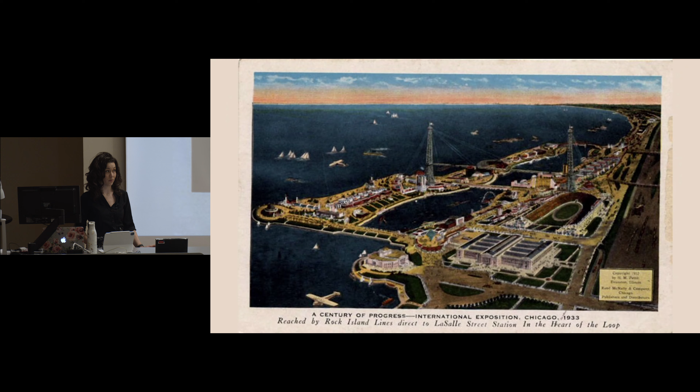The Shedd is a neoclassical temple of white marble and terracotta that was created to educate and celebrate aquatic life. Marine-themed motifs are incorporated in the design and decoration at every opportunity, all over the building's exterior and interior. Every time I go there, I see something that I haven't noticed before. The amount of detail in this building is incredible. Next time you visit the aquarium, look for these details. You will be amazed. They're everywhere. Can we turn this light down?

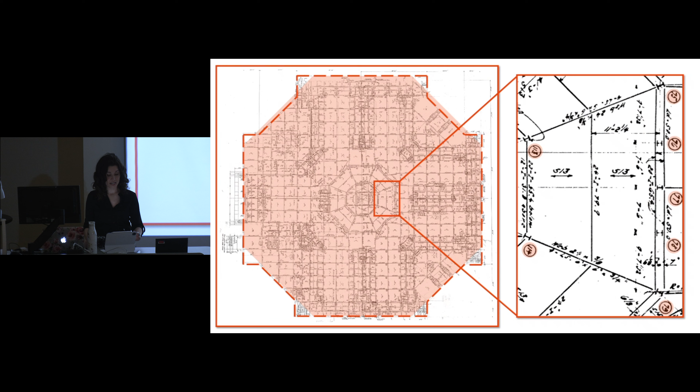All right, the building is supported by a hybrid structural system. Concrete framing at the lower levels transitions to riveted steel framing encased in concrete fireproofing at the main level and roof, with a 5-wythe load-bearing unreinforced masonry wall forming the building's perimeter and lateral system.

The structure rests on composite timber and concrete piles, and at the roof level, these are skylights that are over the original exhibits, and then this is a 10-foot tall parapet wall, which fortunately has an embedded steel frame that is braced back to the roof.

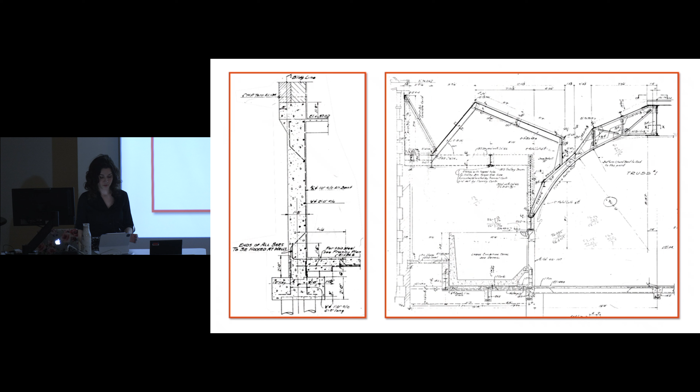Much of the lower level of the basement was originally designed as reservoirs to store and filter the water. The original basins were located in these areas, and I know you can't read it, but they say live load of 500 pounds a square foot.

That's in the basement. Interestingly, in 1930, Shedd's saltwater exhibits were stocked with seawater, not by adding salt to Lake Michigan water, but by transporting nearly 1 million gallons of water by train from Key West to Chicago. Now, Shedd makes their own saltwater on site.

The ground floor, or the mezzanine, was basically a ceiling of these reservoirs in the basement. So it was the lid. It was a 5-inch thick concrete slab, 33 KSI rebar. It had a live load capacity of 10 pounds a square foot.

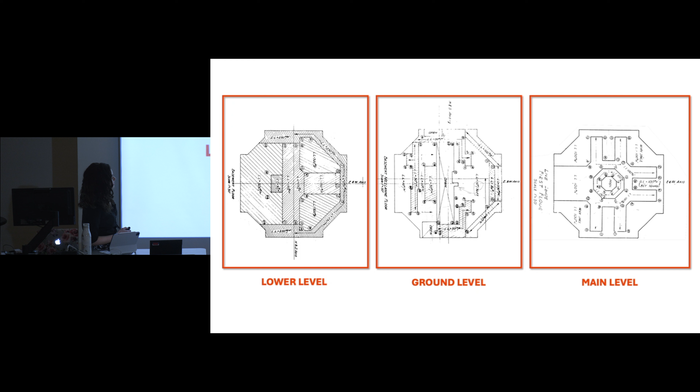Now, if you think about current code, a live load of 10 pounds a square foot is uninhabitable attic spaces with no storage. This limited slab capacity has created many challenges for Shedd over the past 5+ decades specifically, and we'll talk about some of them in more detail later.

Some locations have a live load of 50 pounds a square foot. These were drive aisles for the trucks that had the seawater to come dump them into the basins below.

And as mentioned, above the ground floor, you transition to steel framing, and then here's your main level, and you can see how they delineated these public spaces into each a gallery, and then behind the scenes spaces in the corners. They all have the same live load of 100 pounds a square foot.

All right, beginning around the 1970s, multiple renovations and additions have altered the building structure, expanding the useful floor space within the original footprint and increasing the aquarium's capacity to house animals. Klein and Hoffman has been involved in most of these projects since the 1990s.

Oh, whoops, wrong button. There we go. This button.

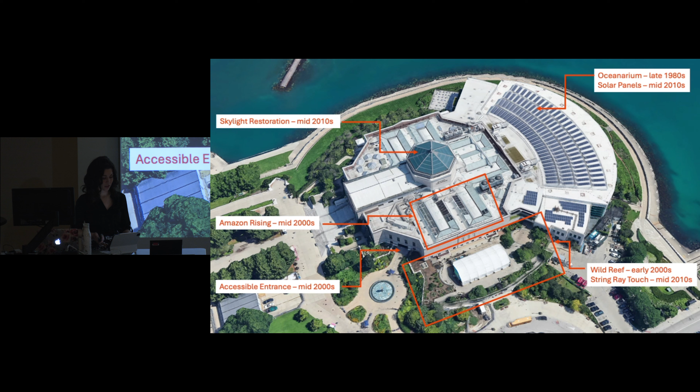All right, so as you can see, Shedd has been very proactive in adapting its building since its opening almost 100 years ago. And ahead of its centennial year in 2030, Shedd Aquarium unveiled a strategic plan called the Centennial Commitment to accelerate its mission and prepare the iconic institution for the next 100 years of service. The plan includes an ambitious experience evolution that will restore the aquarium's historic architecture, modernize the experience for guests, upgrade life support technology, and create more expansive, realistic habitats for animals.

The experience evolution process began in 2018 with an extensive research and master planning process aimed at redefining the visitor experience while maintaining a deep commitment to animal care. A multidisciplinary team, including experts in human factors design, exhibit design, and architecture, created a visitor-focused, actionable plan. As the project progressed, the design team expanded to include 18 specialty consultants, necessitating careful collaboration at every stage.

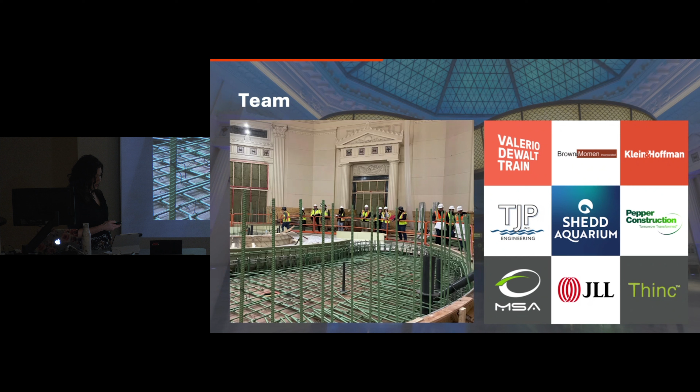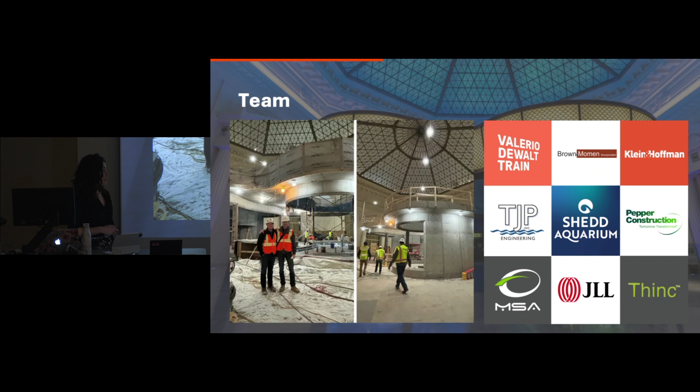Here are some of the primary ones. Obviously, the Shedd is the client. Jones Lang LaSalle is the owner's rep. Valerio Dewalt Train is the architect of record. Brown and Momen and Pepper Construction are a joint venture GC. TJP is the life support systems engineer. That is everything that goes into the animal habitats, so the filtration systems and things like that. MSA is your mechanical engineer, and Thinc is the exhibit designer.

All right, so the experience evolution is split into 4 phases, or really 5 if you want to count phase 0, which was an enabling phase. So what that means is before construction began, the aquarium temporarily relocated animals from their public habitats to environments behind the scenes where they could continue to receive quality care while their new habitats were constructed. Phase 1 was also behind the scenes. It involved closing down the Underwater Beauty special exhibit and relocating Shedd's hospital and lab space so that important animal care procedures could continue without interruption. We'll dive into phase 2 in a minute.

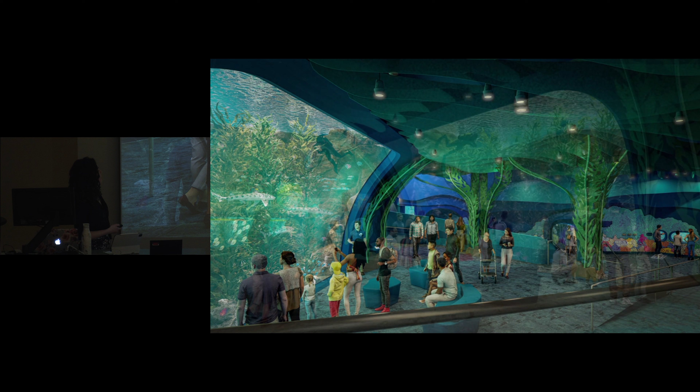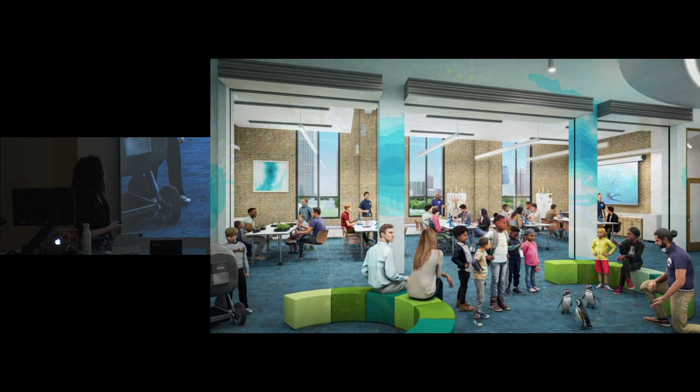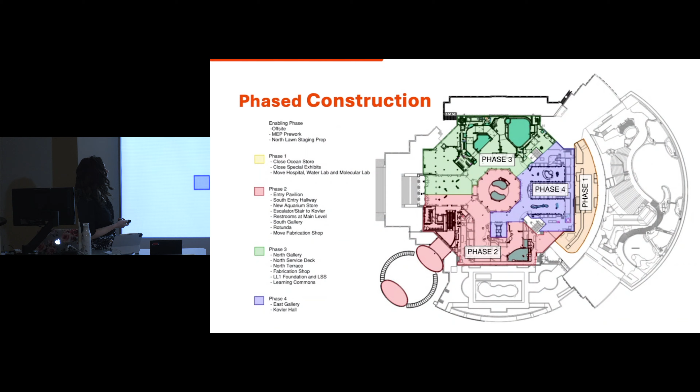The project is currently in phase 3, which completely reimagines the entire north section of the building. And here are a couple of renderings that have been released to show what's to come in phase 3, which I believe will open in 2026. Phase 4 is probably the smallest phase in terms of cost and scope, and it primarily involves non-structural exhibit enhancements to the original East galleries. And it also will be when the entire Kovler Hall is reopened.

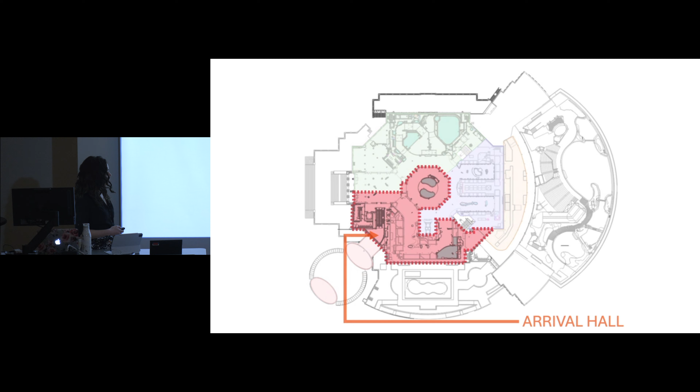All right. Throughout construction, Shedd has remained open. This is a logistical feat requiring precise coordination to maintain animal support systems, visitor pathways, and operational back-of-house spaces. Every phase prioritizes visitor access and uninterrupted experiences. Now, back to phase 2, the topic of this presentation. Phase 2 completely reworked the entry sequence with a new arrival hall, fixed major circulation problems, and reimagined several exhibits, like the center exhibit and the Arapaima habitat in the South Gallery.

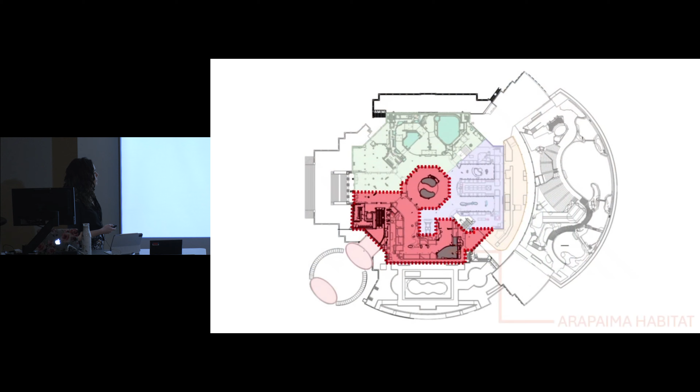All right, you may have noticed that I have not mentioned this little piece down in the southwest corner. This is the new ticketing pavilion, entrance pavilion, and then these trellis features that surround the Man with Fish sculpture. Everything that is outside of the historic building footprint was done by a separate engineer of record. It's kind of unique to this project, but in this case, Thornton Tomasetti designed the entry, ticketing, and trellises. And maybe someday you can hear Thornton Tomasetti talk about this project because it was challenging. Even though it's small compared to everything else going on in the historic building, there were so many challenges. They had to redesign foundations about 3 times due to undocumented obstructions below ground, but that's for another time.

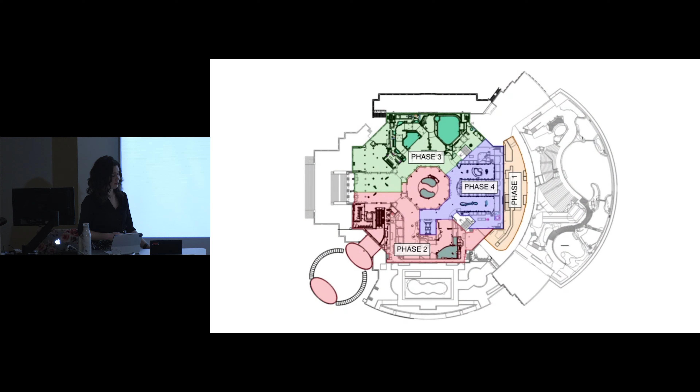But I can give you a little bit of background information on that entry. So when Shedd was first constructed, the main entrance was through these grand stairs on the west. However, once the accessible entrance, which is here on the southwest corner, was added in the early 2000s, that became the primary point of entry. And then during the master planning in 2018, research did confirm that 85% of visitors do approach Shedd from the south, prompting the creation of a new plaza for a seamless, accessible arrival experience.

The landscape plaza and lightweight trellis unify the outdoor space while preserving sightlines to the historic 1930s building and incorporating wave-like motifs in the trellis that you can see there, complementing all the other aquatic motifs found throughout the building. The pavilion roofs are delicately positioned to maintain views with materials selected to complement the white Georgia marble of the original structure.

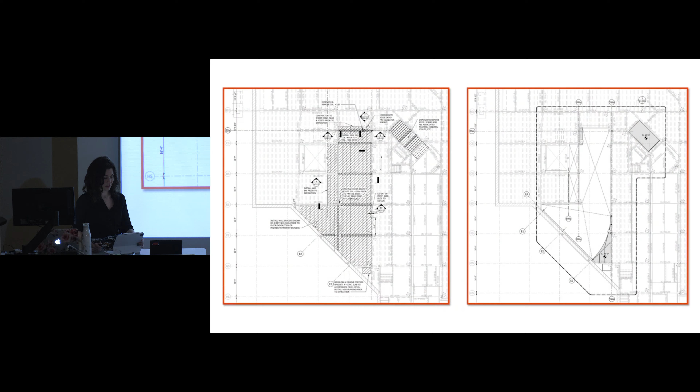So let's talk about how we achieved this. So removing floors is always good for your gravity loads. It takes load off your columns, it takes load off your foundations. However, it means that you now have columns with double the unbraced length. So we had to check all those, but fortunately they were robust enough that we did not need to reinforce any of them.

As I've stated before, the perimeter masonry wall is load-bearing. You can see up here how the roof framing does frame right into the wall. And it's also the building's lateral system. And it has a 10-foot parapet wall. So removing this floor down here, though, means that this wall is now 32 feet tall, unbraced for out-of-plane wind load. And even though it's 5 wythes and it has pilasters every 16 feet, it's not going to work for that kind of span. So we had to design a permanent strong back system to brace the wall.

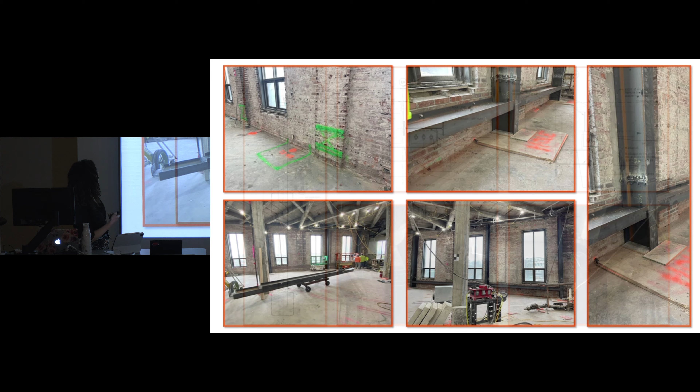And so if you'll notice, so basically we installed columns. I got to get this button right, boss. Back. There we go.

So we basically installed columns roughly adjacent to where the pilasters were, and then the waler is turned sideways so that the strong axis is oriented parallel to the applied load. We also had to mechanically attach the waler to the wall for pressure and suction.

Some modifications were required at the roof level due to the original drawings not being completely detailed, and so once the demo of the ceiling happened and we could actually see the roof structure, we knew that some of our original details weren't going to work. So these ones up here were not our original design, but you can see that the actual installation matches pretty well. That's always nice to see when you see your 2D drawing in 3D real life.

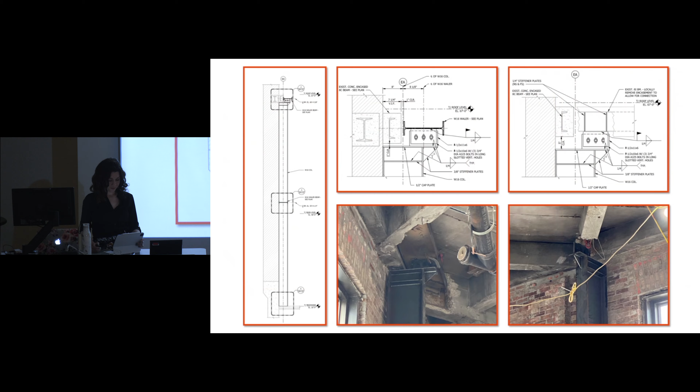And then here are just some photos of the process. So again, the strong back system had to be in place before the floor could come out. So what they did is they demoed small portions of the slab to install the columns. They had to demo part of the pilasters so that the waler could sit flush against the wall for the whole length. Once they got the columns installed, they did their splice, and then here's the horizontal waler getting ready to be installed. Once everything was in there, you can see the bolts, it's connected there, then they could take out the floor.

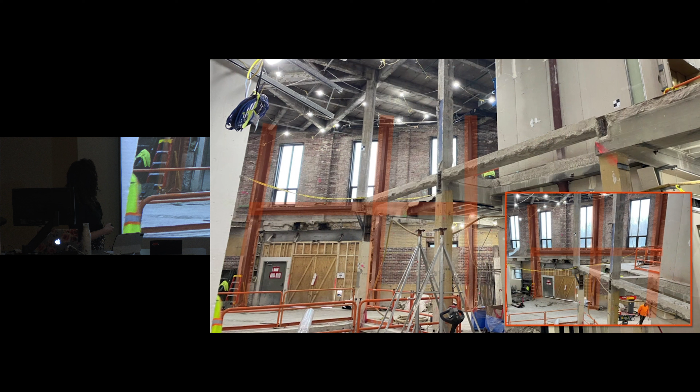Yeah, there's the strong back system in orange. There's so much going on in here, it's kind of hard to see without that highlight.

All right, so from this view, if you turn around, you will see this, which is affectionately known as the golden elevator by the design team. See, there's gold on the walls, and we took group selfies there every week in phase 2. Why? I don't know. We just did.

So the elevator was added in the early 2000s during the accessible entrance project. However, it was really the only way to come into the building and then get up to the gallery levels up here. There was another stair that was kind of back around a corner, but really you came in the doors and then you waited in line to take the elevator. So now, though, there's escalators and stairs, so a variety of options to get you up to the grand hall and galleries.

Now, before I get into the escalators and the stairs, I want to talk about this column. It's a little hard to tell in this image, but the enclosure around this column is substantially wider than this one. Now, why, you ask? Well, I'll tell you. This is column 251A up at the top, or right here in plan, and you can see that it is off-center and skewed from column 251 directly below it. So here's 251, here's 251A. I don't really know why they couldn't have aligned it, but my guess is putting 251A at this location simplified connections up at the roof level, and they probably never thought that this girder was going to want to be removed.

So we were supposed to remove this girder because it's right in the middle of our double height space, but we couldn't remove all of it. And this is not a moment connection, so we had to install this kicker to resolve that off-center load. So once all that was installed, then they could cut that girder, and you will see it is gone from there.

All right, so now back to the escalators. So we had to add framing at the top of the escalator to support the operational load of the truss, the escalator truss, and also to support the edge of the original floor slab that we had cut back. So if you'll notice in this detail, here's our plan, and here's the section. If you notice, we have a tube and a wide flange shape. That was not the original intended design.

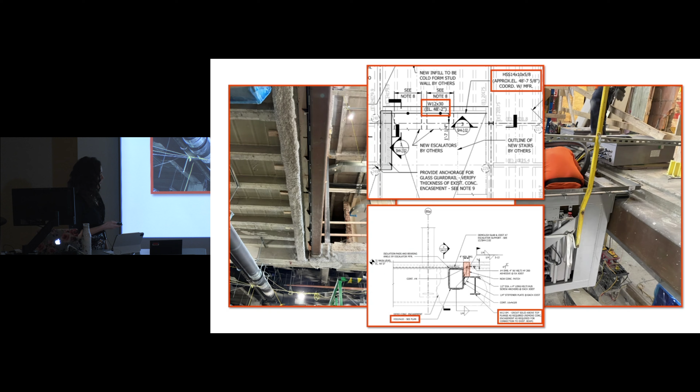So stuff like this happens, right? Things are not perfectly coordinated. At the end of the day, it was the general contractor that should have pointed out to the demo contractor where he should have cut, but it happened. It's 4 inches. You've got to work together as a team to come up with the best solution for the entire project. So that was one small little change we had to make there.

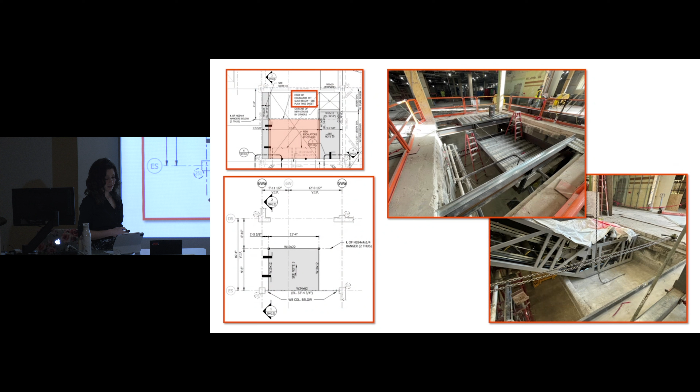Then at the bottom of the escalator, we had a pit to house the escalator machinery. And you can see the mechanism that operates the escalator is down here. It's a little hard to tell from this photo, but we had to make this as small as possible, as shallow as possible, because this space below here is an LSS room, life support systems room. The equipment and filters in this space absolutely could not go offline. They needed access to them.

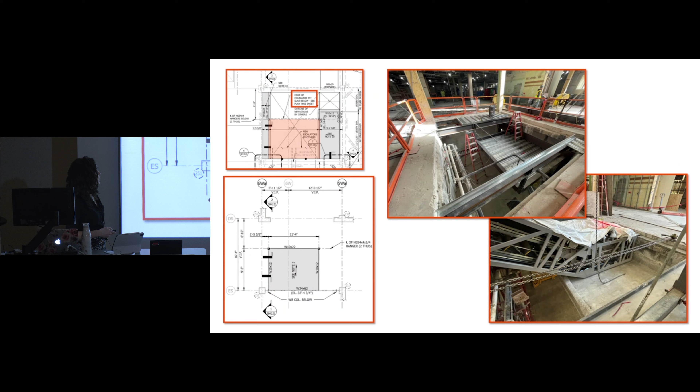And the door to get in that room is right to the north of our escalator pit here. So we squeezed as much space as we could so that there's still enough room to come in these doors and then get to the rest of the filters and stuff that are in the space.

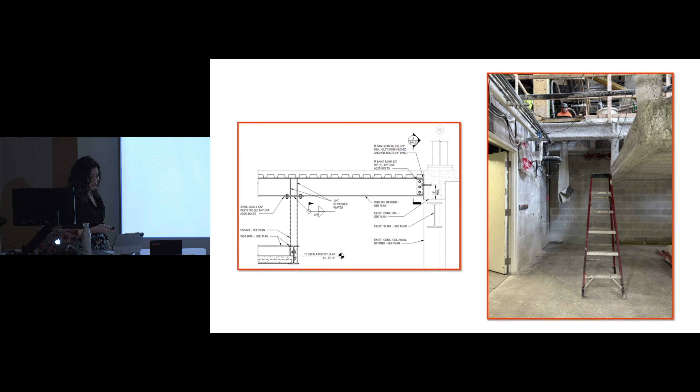And in our detail, you'll see that we actually tucked the slab up into our framing. Normally you have your framing and your slab sits on top of it. Well, you can also do it this way and save yourself 12 inches of clearance. You still can't walk under here. That's not enough height, but it's sufficient for Shedd to still use the space for storage and things like that. So that was a must on their end.

And here are just a few photos of the installation. On an escalator, this is called the truss. The two sides are trusses. They come to the field like that. It's installed, and then each of the stair treads is installed one by one once the truss is in place.

All right, now on to the stairs. The stairs were pretty straightforward, but they did impose a large point load at the base and the center. The center landing post did impose a load on our ground level structure. And remember, our ground level structure has no capacity, more or less. So we needed to reinforce, but we didn't have access from below, so we designed an option to reinforce from above.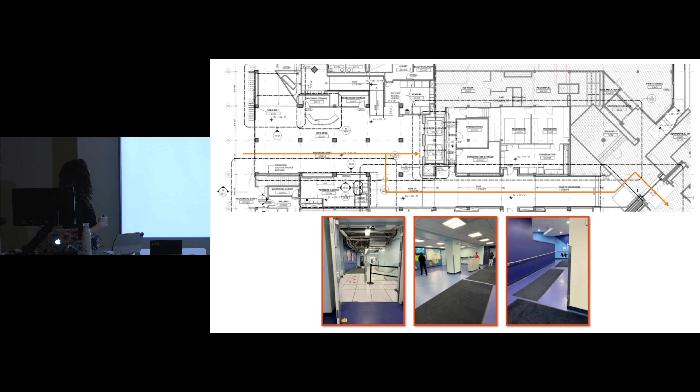So most guests, the arrival hall is over here, and there's those stairs we were just talking about. Most guests will go up those escalators or up those stairs to the grand hallway and those galleries. Or you could take this new hallway to go to the Wild Reef elevators and go down to see the sharks, or you could keep going up this ramped hallway to the oceanarium to see the penguins, the belugas, and the Pacific white-sided dolphins, the otters. I'm probably missing some more.

Previously, the access to get to the oceanarium or the wild reef was - you had to go up the stairs, then go around the rotunda, and find the elevators to go up or down 2 floors. Or you had to find the 2 stairs that go down to the oceanarium. It was very convoluted, and so this streamlined circulation pathway was a huge goal of phase 2 specifically. What this space was previously, I think, was a lunchroom, with some offices on the sides here. It was just a really weird, not well-utilized space.

So that relatively simple renovation - we're just adding a ramp, right? Not that big of a deal. Well, remember when I said that the ground floor had a capacity of 10 pounds per square foot? That created problems for Shedd for like 50 years.

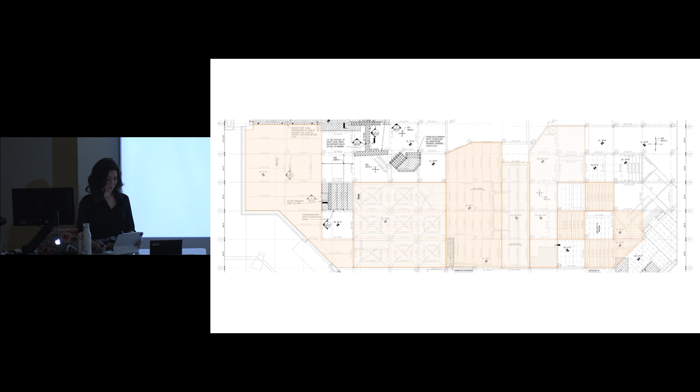So here's that ramp that I was talking about. We had a big elevation difference. We're at roughly 35 feet here, and we're going to 39.6 over here.

So to reduce the amount of load that we're adding, we opted for a thin concrete slab on metal deck, supported on metal stud knee walls. That was about the lightest structure we could do.

Fortunately, all those prior repairs and reinforcements that Shedd had already done made it so the slabs worked. We didn't need to reinforce the slabs. However, several of the beams along the perimeters were failing, either in flexure or in shear, so we had to reinforce them.

This was our original detail. It was basically an underside and a topside reinforcement option. We added longitudinal bars here to increase the capacity in our tension zone, and then this bar here gives us the missing shear capacity that we didn't have.

However, during construction, there were 1 or 2 locations where we absolutely could not do anything from below due to LSS piping that could not be relocated. Fortunately, in those cases the beam wasn't failing in flexure, it was just failing in shear, so we were able to just install the shear reinforcement from the top side.

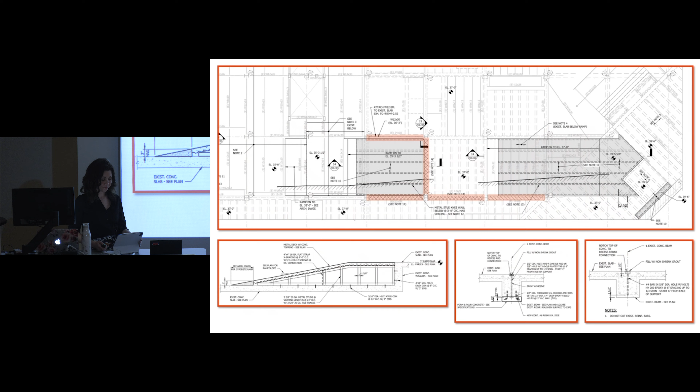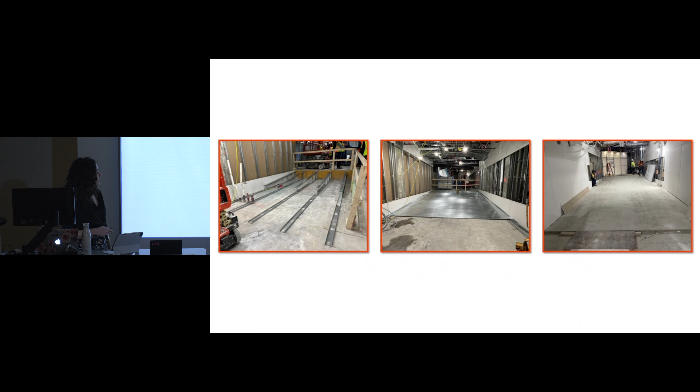Here's a few photos of the construction. So here's those knee walls being started, metal deck is added, and then the concrete is added after that.

All right, now moving back to the arrival hall. Here's that golden elevator, escalators and stairs. Behind it is the new gift shop.

Again, this area was originally a base capacity of 10 pounds a square foot. A gift shop needs 100 pounds a square foot loading. So this area in the 70s became the education wing with classroom loading of 40 pounds a square foot.

I mentioned Shedd has excellent documentation of any building I've ever worked on. They by far have the best record keeping. However, this is one set that really needs some work. We have 2 sheets for this education wing, and they all look like this—you can't read half of the general notes.

We can see that they did a raised floor system, which is lightweight concrete on CMU blocks for these knee walls at 3 foot on center. There's nothing in here that indicates that the slabs this system is sitting on was reinforced.

It's clear they were trying to spread the load. I don't know if they were thinking, okay, we'll make it linear and now it'll work, versus a uniform load. But you're adding dead load, and you're also adding live load because you're going from 10 pounds to 40 pounds of live load. I don't know—this is one big question mark still. We don't know what is going on here. But anyway, that's a mystery that will never be solved.

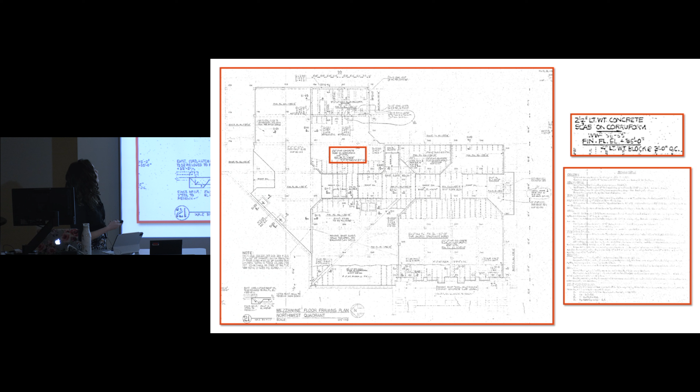Now it's no longer the education wing. The classrooms are moving up to the main floor during phase 3 of the project. Now it's the gift shop. So we've got 10 pounds capacity, we need to get to 100. How can we do that? There's a couple options we looked at.

There's something called a bonded overlay, which I won't get into all the technical details of, but it's very hard to achieve. You have to do very specific surface preparation to the base slab you're pouring your new slab on top of, and you also have to test that bond. Lots of times it fails, so what's your backup plan if it fails?

Furthermore, you're limited to the amount of capacity increase you can achieve—I don't think a 10-fold increase would have been allowed by code. We also looked at reinforcing by adding steel framing below the slabs. This would allow us to cut down our span, but we didn't have access in all areas, so that didn't work either. So what we ended up doing is we designed a new 6-inch cast-in-place slab using the slab that was there as the formwork.

However, that needed to be shored for the wet weight of the concrete. And this is also the area where we're transitioning from concrete framing to steel framing.

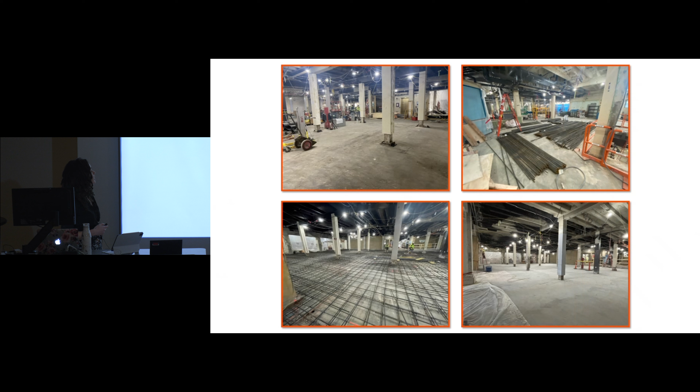Here's rebar installed. Obviously you can see visually where you have darker rebar, that's where you have higher reinforcement for your tension zones. And then this is the completed slab. It looks basically just like this one, only you can't see the very base of that.

All right, so that was the gift shop slab. Now the most complicated part with the gift shop slab was the entrance.

Actually, I'm going to go back a few to show you. So here's the architectural plan. This is their entrance to the gift shop, and column 227 is located right there.

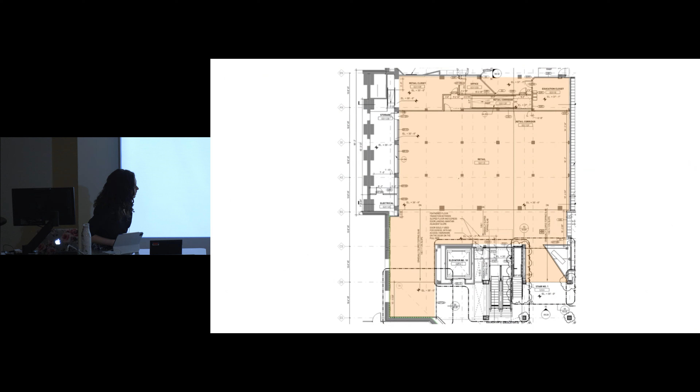So basically, I think this is our third column. So 227, oh golly.

So here's the historic west stair going up from the ground level up to the galleries. That's the stair opening right here. The corner of it is column 227. Column 227 goes down to the ground floor and lands right there. There's no column below it, so it's on a transfer girder. Three transfer girders support column 227.

The transfer girders are 36 inches deep, and for reasons that nobody knows, 18 inches of that transfer girder are above the slab, and the other 18 inches are below the slab. I feel like they probably did that because they needed the space below, so they didn't want a 36-inch beam going into the basement level, and the ground floor, remember, was unoccupiable basically. So an 18-inch tall curb wasn't really a big deal 100 years ago.

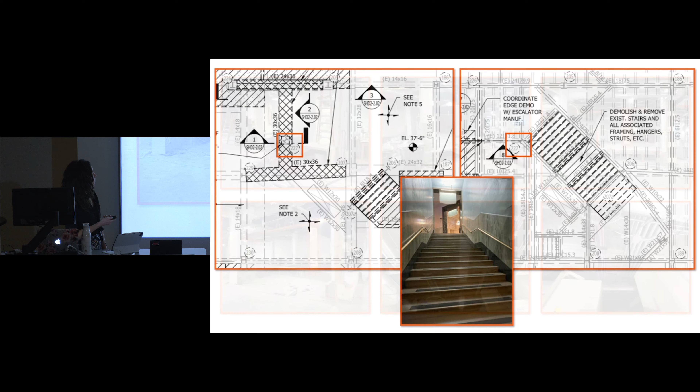Well, now it was a big deal. So we explored, so here's just some demo.

So we couldn't see these transfer girders because Shedd years ago had installed a raised floor system, and this was like an IT room. So it wasn't until they demoed that we could finally see, yep, those transfer girders are exactly like they are shown in the drawings.

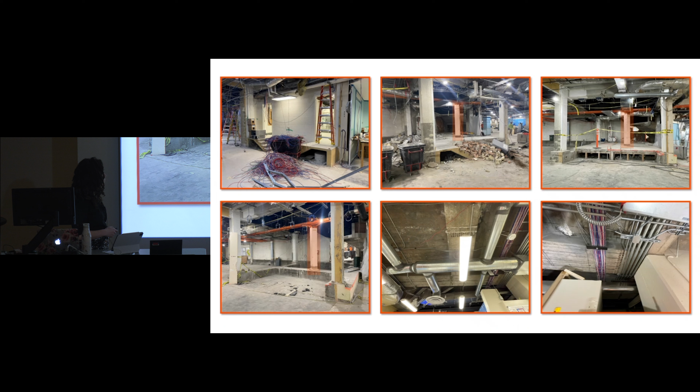So we looked at getting rid of the column. Was there a way to completely reframe the main floor that it was supporting so that we didn't need a column at this location? But that would have, you would have to cut out so much of the main floor to put back an efficient system.

So that was nixed. Then we looked at, well, could we add a column below here? Below here is a staff lunchroom. Could we add a new column below here with a smaller foundation so that this load just goes straight there, and then we don't need any of these transfer girders? Well, anytime you say the word foundation, the costs quickly escalate. So that wasn't an option either.

So, oh, and then before I go into our solution, so these are the beams from below, and notice this data tray and these conduits. These two items serve Shedd's command center, which, as I understand it, monitors basically every system, every habitat, every filter, how much solar energy is being pulled in from the panels. All of that goes into the command system. So these guys were not going anywhere.

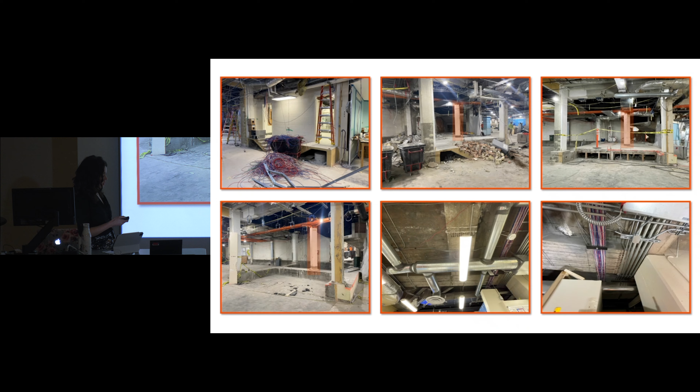So what our solution was: okay, well, we need to get rid of this part above the slab, so let's enlarge the beam below. We made it deeper, we made it wider. We have number nine bars with a 180-degree hook. And then we tied it all in. We have these stirrups that had to be drilled through the original slab and then bent into the new slab, which I will show you in pictures what that looks like.

So again, staging for our rebar, and that's installed. A number 9 with a 180-degree hook is a very big deal. Try to avoid it if you can.

And then here's those stirrups that came up through the slab. So once the rebar below was installed and the concrete was poured and it was cured, then they bent these bars into the slab like so.

They demoed the transfer beams, and then here they did do a bonded overlay reinforcement. This was just in one bay, so we were more comfortable doing that here versus all the gift shop solution where that was like 16 bays.

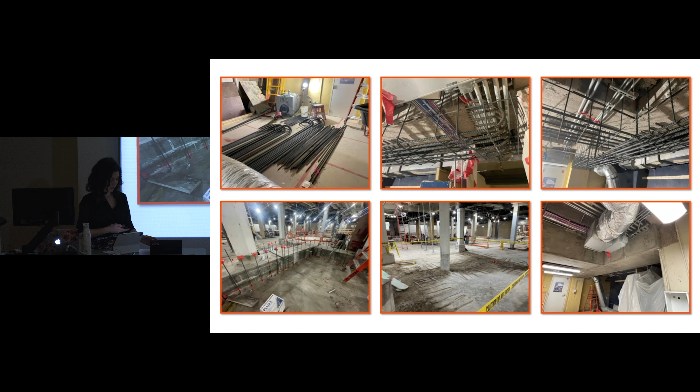All right, so let's move on to some exhibit enhancements, shall we? Is it really 6:51? Wow. All right, I'll go faster.

So the original Rotunda exhibit was called the Tropical Pool, but it was affectionately known as the Swamp. It included a recessed area in the center for alligators and other swamp animals. It wasn't until 1971 that the center exhibit was extensively changed into what most of us remember, the Caribbean Reef.

So the new transformational Wonder of Water exhibit had to fit entirely within that same footprint as the original swamp and Caribbean Reef. And the structural design of this exhibit requires a presentation of its own, and I'll do my best to provide a very high-level overview of the complexities and challenges. And for the sake of time, I will probably skip through some of it, actually. I'll just have to come back and tell you more about it.

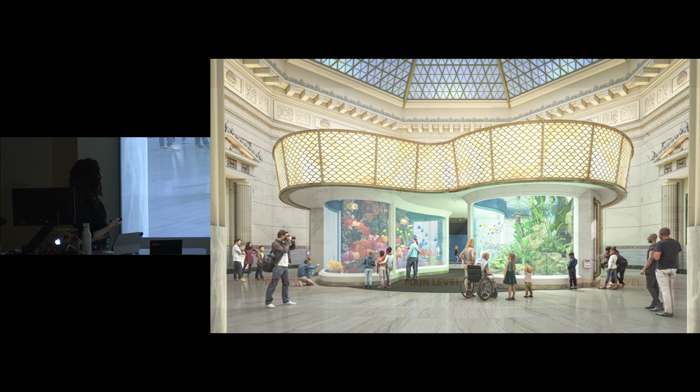But basically, the Wonder of Water was a juxtaposition of a saltwater habitat and a freshwater habitat. So it needed, obviously, 2 different exhibits, which meant 2 different life support systems, 2 different sets of plumbing lines. They had to be completely separate. 2 different lighting systems, because you're inside the building, and the saltwater tank has live coral, which needs very specific lighting for the coral to grow.

So let's see. So obviously this is, hold on.

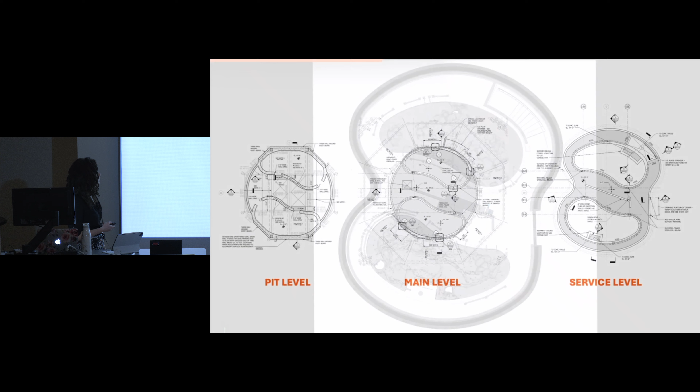So this, with this very unique organic shape, we made it out of concrete, except for, sorry, except for these 4 columns right there. Those are steel tubes filled with concrete. The exhibit designer was very specific that he basically wanted a very thin vertical support there, and he gave us 8 inches square to work with. So if you're talking about an 8-inch square footprint in concrete, you've got your concrete cover, you've got your ties and your vertical bars, you basically have nothing left in the center. So really, concrete filled steel tube was the only option.

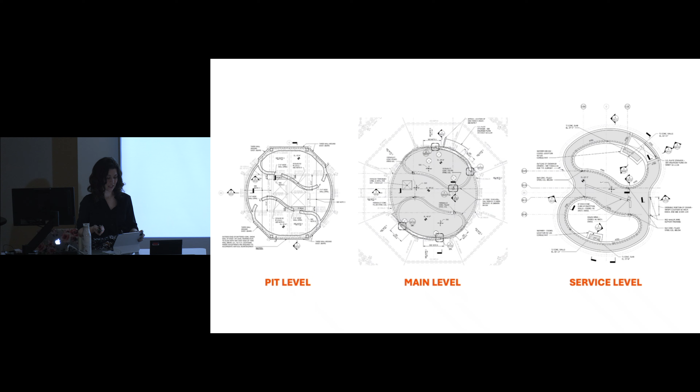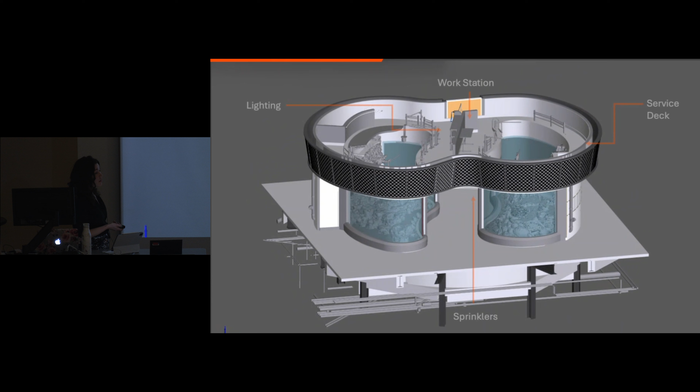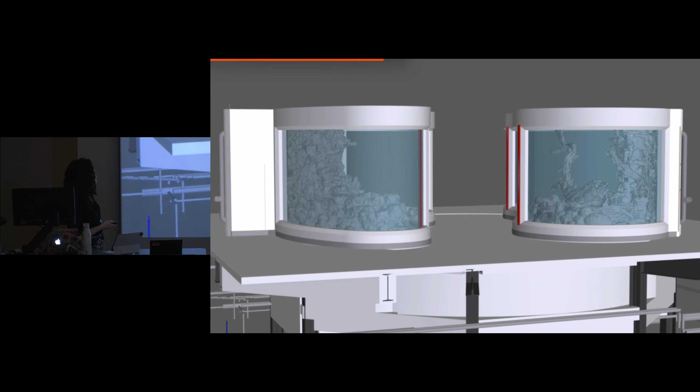All right, these next slides have quite a bit of commentary, so I'm just gonna skip it all for the sake of time, but we'll go through the model. Basically, there's a lot of stuff that had to fit on the service deck. We needed a continuous walkway around the entire thing, but we couldn't have any vertical supports beyond the service deck. Then you got your tanks. Why is this not moving? There we go.

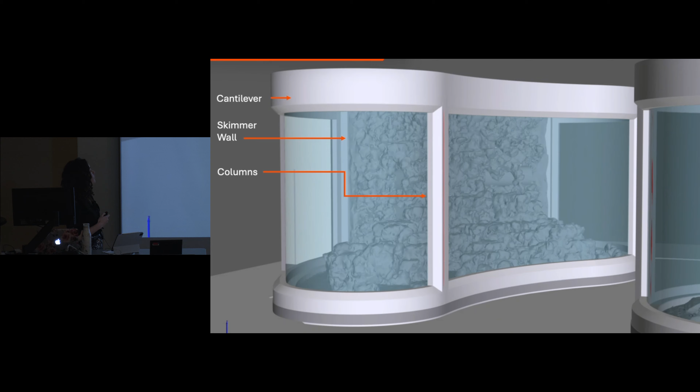So there's one of our concrete-filled steel columns. Fortunately, we got an actual wall on this side, but then this is a beam that's supported here and it's supported here. So it's a curved beam that's cantilevering. Then here is the space below the tank slab. On the underside, now we're in that original pit. That's where all your life support stuff has to go. It's very congested under there.

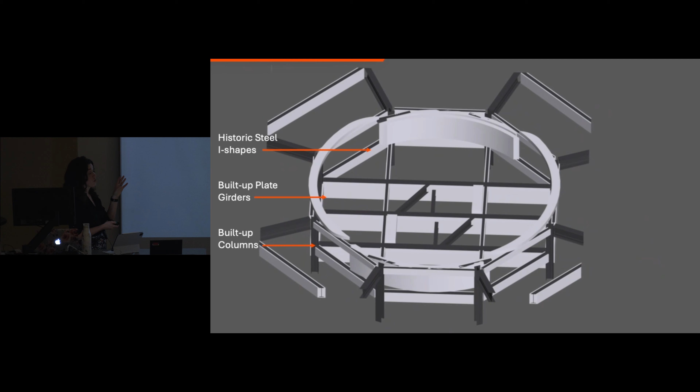We don't have time to go through the analysis. There's a lot of unique stuff to talk about. And again, this presentation is an hour all in itself. But we checked the original structure. Again, this is historic steel, 18 KSI allowable stress, but very over-designed for what we needed. So we didn't need to reinforce the plate girders or any of the columns.

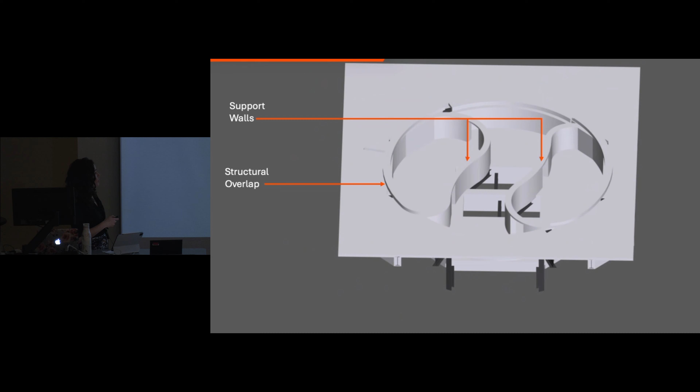So in the other image, you saw all of the life support pipes and stuff that go through here. Well, you need access to those. What if there's a leak or you need to repair them? So we accommodated 2 access openings in each of the tank walls so that a person could get in there and do future repairs if needed.

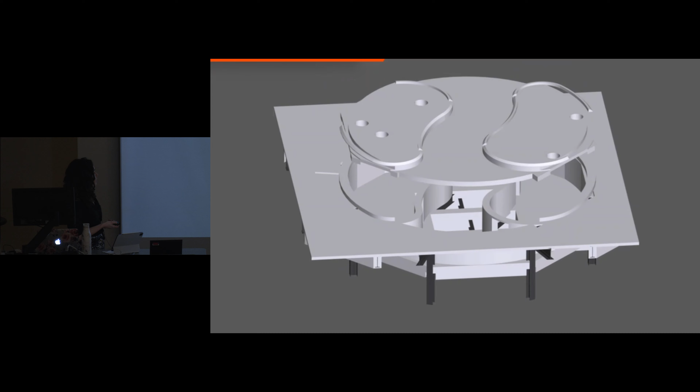Now, the curves on this, there are, I think, 5, yes. So the design, the analysis really wasn't that complicated. The design, you've got your load, you can figure out what you need. It's the detailing that was so complicated because you can see with all of these curves, how are you gonna fit the rebar in there? So rebar can only be fabricated to one curve. And then it can lap with another one that's at a different curve.

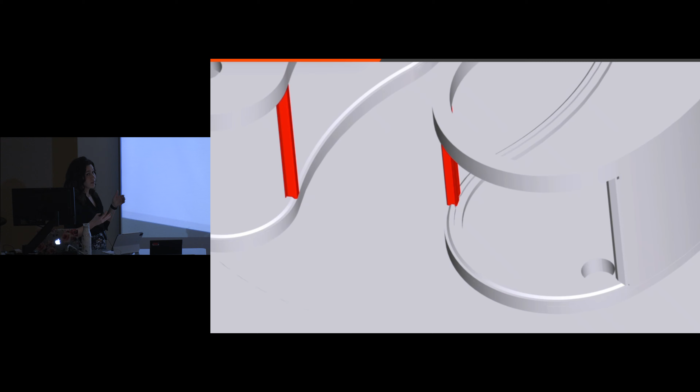And then, so you'll see the three window areas, that's where we had three pieces of acrylic, and then our concrete-filled steel tube, we added plates on the acrylic side so that the acrylic could bear right up against that. And then back to the service deck. So there's that ring beam that I talked about in yellow. So it's supported here at the wall, and it's supported here. It's curved, and it's cantilevered out here. Plus, it's supporting this slab, which is only on one side, so now you've got torsion on the beam.

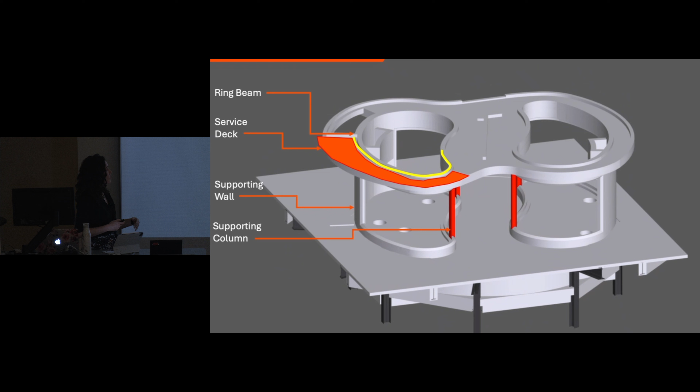Then, around the whole perimeter of this thing is this light railing that is serving as a guardrail. It also has lights on it, so it's now an extra linear load at the edge of a cantilever, further exacerbating our torsional issues. Anyway, we looked at each one of these things separately and resolved them, made sure our reinforcing was accounted for it.

But again, like I said, we could present on that just by itself. So now let's look at some photos of the demolition and construction. So here is the original, not the original, this is the Caribbean reef. So it was basically a big bowl that sat in that original pit.

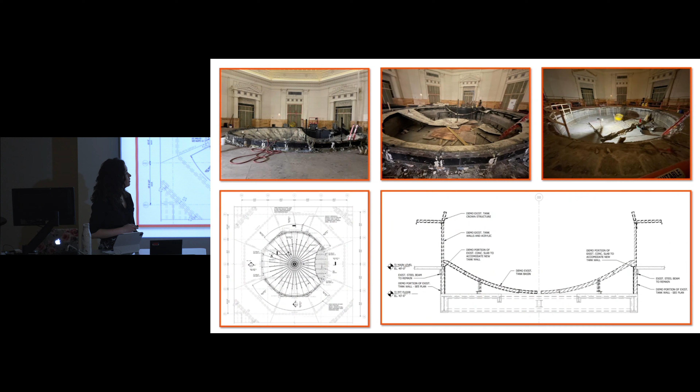So here it's being demoed, and now you're seeing that pit being exposed, and then the openings that go all the way down to the basement that you can see right there, those are covered with a work platform, so you can't see them in that image.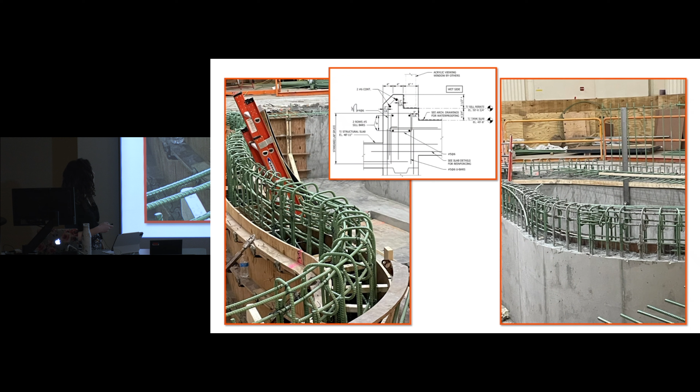Sorry, guys. So concrete is poured up to a certain level, and then we've got our slab between the exhibits to be poured. That's this one, and then the upper slab at the actual tank level is then poured with the rebate and all of this. All right, this one. So this one really shows the rebar congestion issues that we were dealing with.

And then you've got to do your top mat just a few inches away. So this is what it looks like when it's all said and done. And believe it or not, this is actually less congested than what it could have been if the contractor had just straight followed our drawings and typical details. They had concerns, they brought them to us, we worked through them in the field to make sure that the bars that we needed could be installed, but that there was still room for the concrete. Because honestly, in some cases it was so congested, there wasn't room for their vibrator to get down in there.

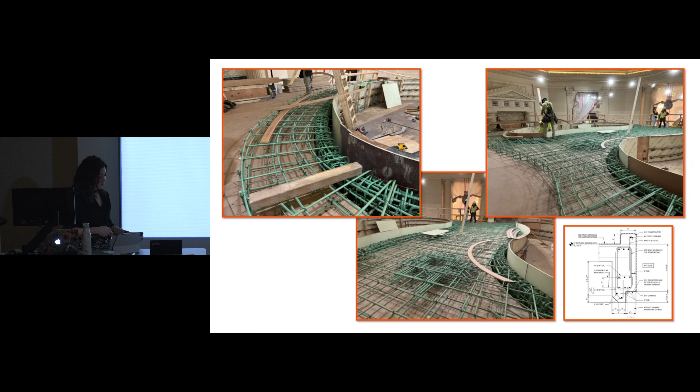And then here is just a picture of the space below once the slab was done. And this is up at the service deck. So here is that ring beam, that cantilevered ring beam that's going from a wall to the column over here. Here's another penetration in the slab, so you can see what I mean about the additional rebar around a slab penetration.

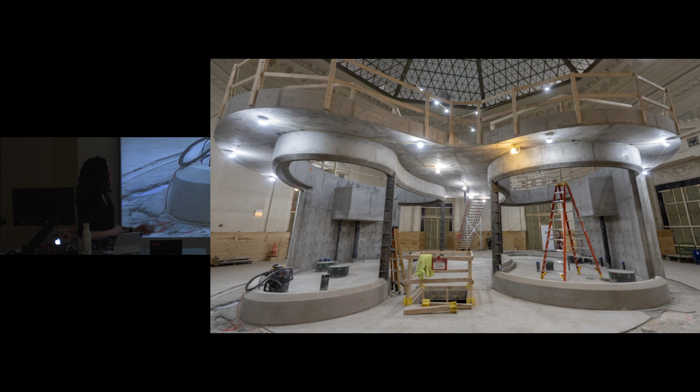And then when it was all said and done and the shoring was removed, this is the prettiest concrete I've ever seen. So I don't know about you guys, but I would be okay if they had left it like this, but unfortunately this doesn't hold water very well and people want to see fish, so they had to cover it all up. But doesn't it look cool? I think it looks cool.

And then here is them bringing the acrylic into the building. So we actually did think about the maximum size of acrylic pieces that we could physically get into the building. And you could see we basically were maxed out in height.

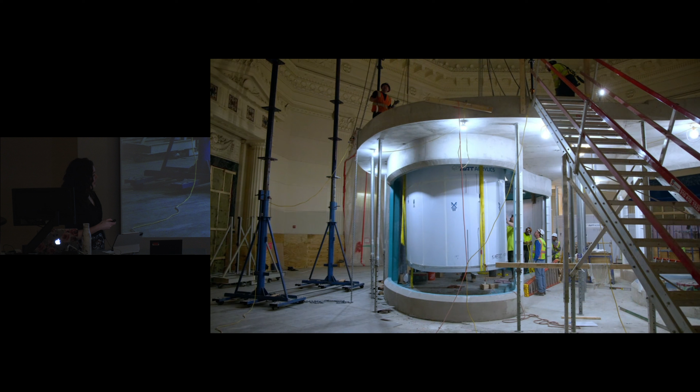Then because the openings have rebates on the sill, on the jamb, and on the head, the only way to install the acrylic was to lift it up over the service deck and then drop it into place. And you can see right there, it's touching the ring beam, and there's only a couple inches to spare over here. So this was very tight, but the contractor was fantastic and everything was installed, no problem.

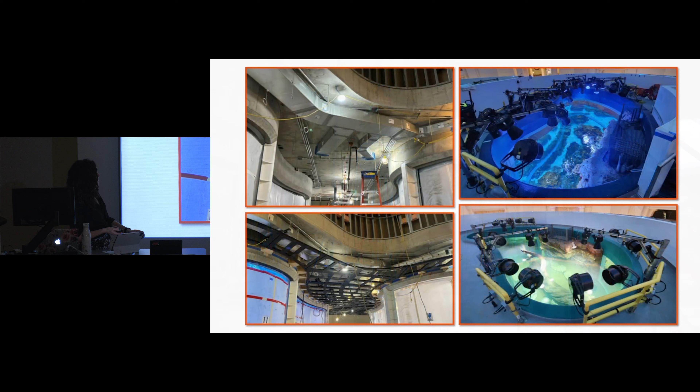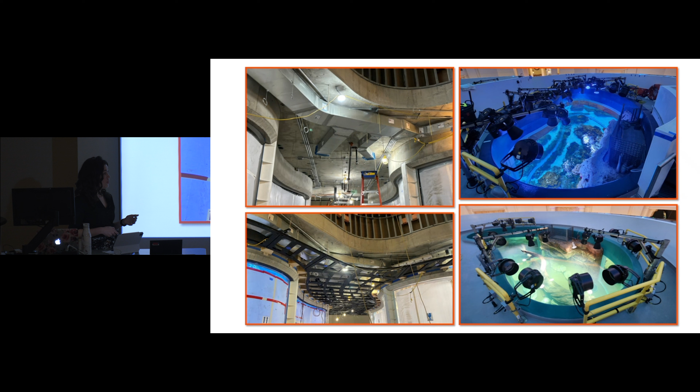And then lastly, just a few quick mentions. I skipped over a lot of the structural stuff, honestly, but there were so many other things with this tank in particular. I mentioned lighting. So again, this is the saltwater habitat and the freshwater habitat. They each have their own lighting requirements. You can't just put lights on the edge. You need to get them out over the middle of the tank for maximum effectiveness.

So these swing arm, but then how do you change them? Like if a bulb goes out, how do you get it back out there? You could get on a little raft and go change it. That's what they've done before, but that's really not safe. And so these are swing arms, so you can rotate them back off to the service deck when you need to do maintenance to those lights. We went back and forth on these lights for so long. I have to say, this was probably the most complicated part of the whole project, believe it or not.

And then underneath the service deck, this is an occupied space. This is where all the visitors go between the tanks. This had to be sprinklered, so we've got sprinkler lines in here. You've got electrical, it needed to be conditioned, so you've got your ductwork going under there, and they didn't have a whole lot of space to work with either. So a ton of disciplines in the coordination on this tank. We were meeting for months before we finished design, even during construction, still trying to make sure we had the best, most efficient solution.

So then closing this out, again, a comparison of the rendering and the final completed project. And I think the team did a pretty good job.

All right, this is the last section. So the Arapaima exhibit. This is another great example of repurposing the existing structure from a previous era of renovation. So Amazon Rising, as I mentioned before, was constructed in the early 2000s, and it utilized 36 KSI steel. So this was right at the transition between using 36 and using 50 KSI steel as standard.

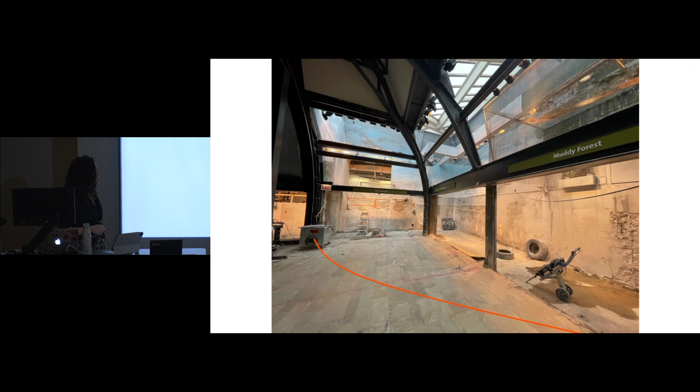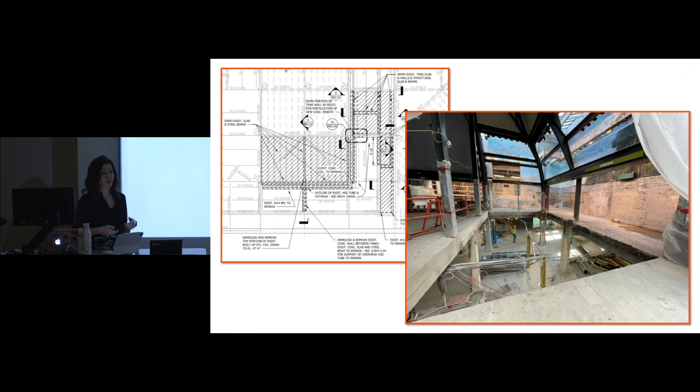So that was originally public space, concrete joists, 100 PSF, but 100 PSF is about 18 inches of water. We needed 5 feet of water, 5'4", I think. And so really the best way to do that was to remove what was there and go back with a new, more robust system. So we demolished the concrete joists and we went back with a composite steel frame system. So this is this, and here's with the rebar, and you can see right here, that is the rebate that the acrylic will sit in.

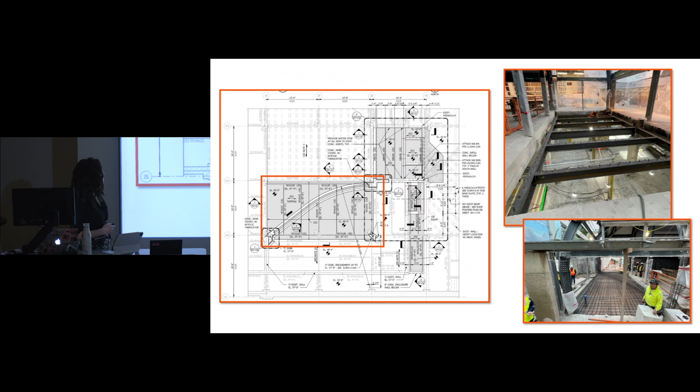Now, to our last column problem of the evening. So the complication with expanding the Arapaima exhibit out into the public space is that this column is column 88. Gosh darn it. Column 88 is now going to be in the middle of the tank. Before, this white area was the original tank, and it was just outside of it. Well, this is supporting the corner of the curved roof trusses, so it's a pretty important column.

And so we had thought, okay, can we somehow install a transfer girder above the water level, so that this truss comes down onto that, and then we don't have to worry about it being submerged in water. But the size of a transfer girder that we would need would be so large that it would take away from the exhibit experience. So we decided that it would stay within the exhibit and we would just protect it.

So that's this column. Now this one, the concrete one, he's not supporting the roof. His purpose is to support this rebate. The rebate is what holds the acrylic in place. So the original tank had a piece of acrylic right along here, and that's what this concrete column's purpose was. During Amazon Rising, this little access catwalk was added, and it's also being supported off of that guy.

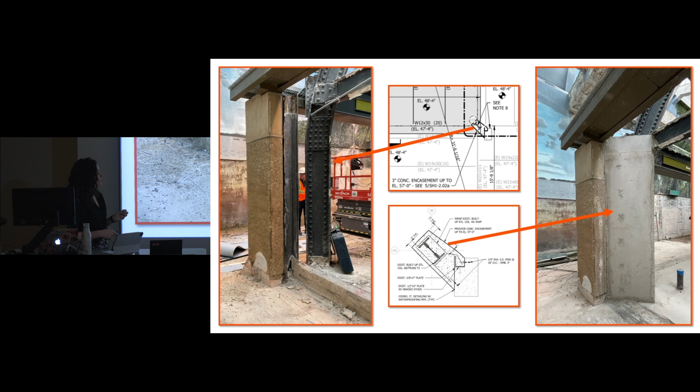So it's 2 independent columns, but waterproofing riveted steel was going to be very complicated, so we encased it and combined the 2 into 1 column, more or less, and then waterproofed it, and then put a tree around it so you can't see it.

And then here are just a couple images of that acrylic being installed. I think this piece was like 32 feet long, maybe. So they're getting it into place over there, and then there it is installed. I think this is an actual photo. This might be a rendering, I'm not sure. It's hard to tell. And then comparison of the rendering to the completed construction.

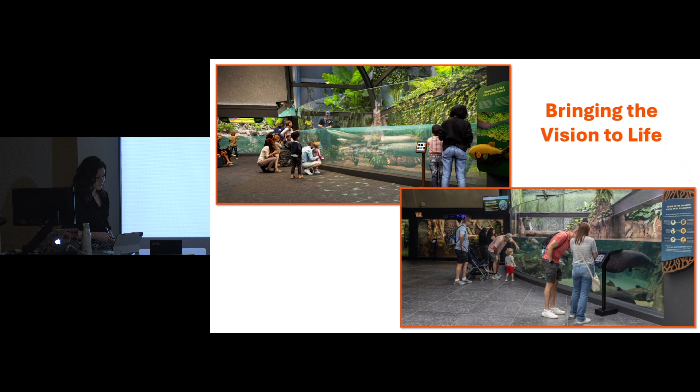So, as I've mentioned, there's a lot that I didn't get to. Klein and Hoffman were also involved with a capital project that's going on right now too, to replace all those original skylights over the exhibits. We're also doing a re-roofing project over the entire historic building. That construction is happening simultaneously, but is separate from this experience evolution project.

Honestly, I could talk for 2 or 3 more hours about this project. The nuances of the design, the things we had to work through when they actually started constructing things. Normally when you have a client, it's people, right? Well, here at Shedd, your client is sometimes people, but it's also animals.

And so a lot of our initial design meetings and planning meetings, during SD and DD and CDs, was with Shedd's animal care team. And they would tell us what they needed to care for the animals, how much space they needed to do their dives into the exhibits to care for the animals and things like that. So, truly eye-opening experience to be involved in those major logistical types of projects.